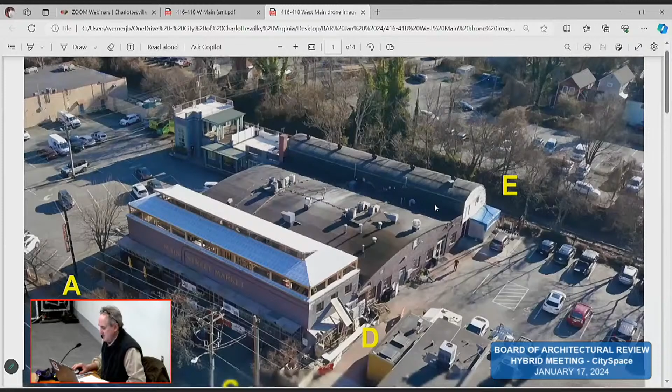So we had a preliminary discussion, so save your voice, I know you're feeling poorly. I'll do my best. So this is 416, 418 West Main. I've got an image up here on the screen from Alan, or Greg was out drone piloting last week, and I added these. There's a couple more, but the A, B, C, D, E in the proposal corresponds with these.

I had E up on the side there next to D in the staff report. It's a deck that'll be constructed on the back part, but if you want, these images are helpful in any way. I can go to them if necessary, and I know Greg and Alan are on, if they want to use them, they can.

So there's this, it's a structure, actually several structures, dating to the 1940s in the downtown ADC district. Just to point out, I know they are on West Main, but the downtown ADC district continues another block and then becomes West Main. So maybe, again, something we'll probably address with the guidelines. But obviously, these were automobile-oriented buildings on West Main, and they are contributing to the district.

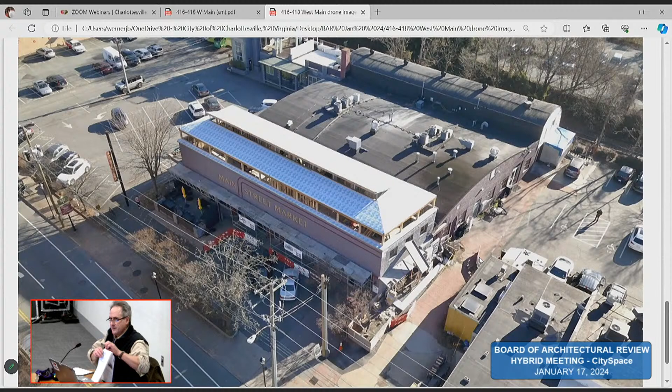The request that they're making is across the front, which would be the south facade of the building along West Main, and then on the west side, constructing some canopies across the front, and on the side, an elevated deck with some canopies above. You all reviewed, well, discussed this back in September, and were generally supportive of it. So now it's coming back as a formal request. There's some details associated with the design, the railing, the canopy.

Those reflect designs of other things already done on West Main. For example, the gas station with the canopy, now called Black Cow, has an identical design. I realize there aren't detailed drawings of some of those things, but there are references to where they've been employed on other sites. Hopefully that will suffice, but Greg can address any questions you have about that.

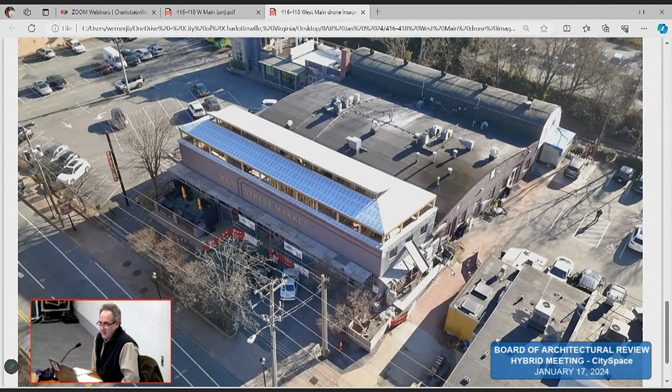You guys there? Yes, hello, this is Greg. Hey everybody, can you hear me? Yep. Thanks. Alan, you on? I am here. Okay, can you hear me? Go ahead. I can do an initial introduction, if you like. Try to pick up where we left off. We had come with...

It's interesting, that photo—before you move on, the scaffolding we have up there for construction of the upper addition has sort of a mock-up character to it, at least for the central canopy we're talking about across the sidewalk.

We came with a canopy over Orzo, similar material as mentioned at 420 West Main, Little Star, now Black Cow, and a little bit of a canopy over Albemarle Baking Company, and a side deck and canopy. Some of the comments were to go to steel.

We have wood for Orzo. There was a feeling that the lighter weight of steel added to the success of 420, and also the character of the buildings in that area.

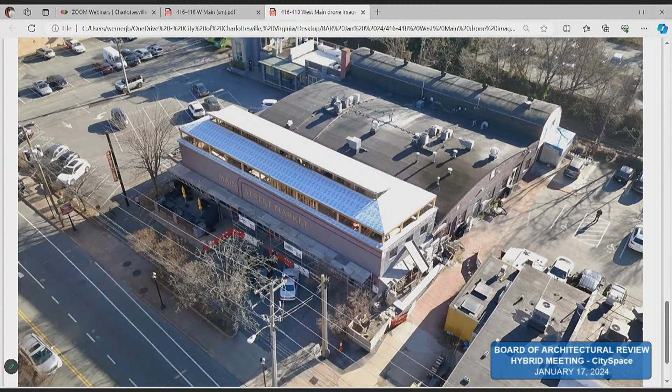So I don't know if you want to go through some of the images. Jeff or Alan, you want to add anything? No, I'm okay.

So, as described, I've tried to keep it brief. We're using the same type of language of the metal tube. We're going to go for darker—we're proposing a darker color, not black, but dark gray, probably towards a warmer gray, just as a nod to a softer color, perhaps.

I know Orzo had wanted wood. We do have wood as purlins in this design, so there is a layer of wood at the purlin level that's above the rafters, just below the white poly roof, that would be there at a regular rhythm of 3 feet on center.

I don't know if it's just worth getting into and asking questions, but I believe we covered a lot that was suggested, and had sort of a comprehensive layout.

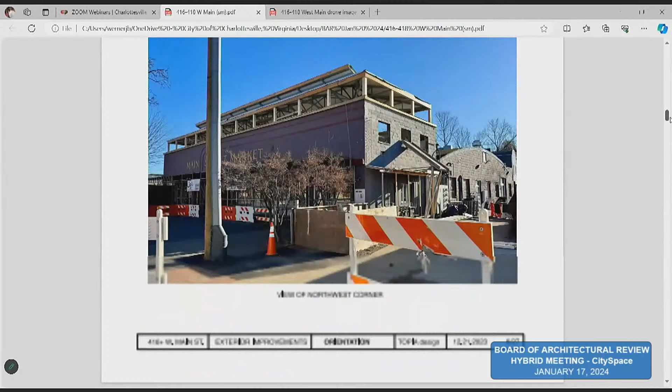I'll just scroll down to the renderings. Some of the initial images are just context, I think, in case you couldn't get out—if you had the flu or the snow or something.

So that's an image. You can see the side deck is flat now with the canopy roof lowered, but it's set back—we didn't want to bring it into the side of the building. And I think there's a desire not to have it fully open, but have some area that's covered for that upper area.

So that canopy on the side deck sets back coming from the corner of the existing building. And there's columns that hold the front part of the poly roof and metal framing, with columns, 3 over at Orzo, coming out of the existing planters that are there.

The brick planters with the wooden slats of previous BAR, it's constructed coming out off of those, and then 2 columns at the Albemarle Baking Company, and for the stretch between those 2, they're supported by cables or rods—that was suggested by the structural engineer, and it lends to the character of those type of canopies.

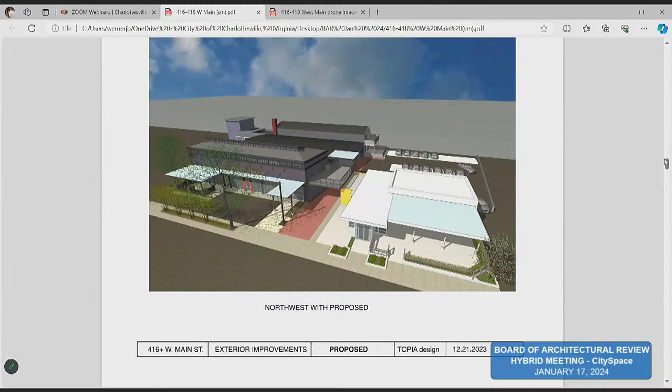And the rear, all the way around to the old fish market building, those are all enclosed with a cement panel railing, similar to what we've done across the street. I just put an image in there, but we're looking at using that for that back section.

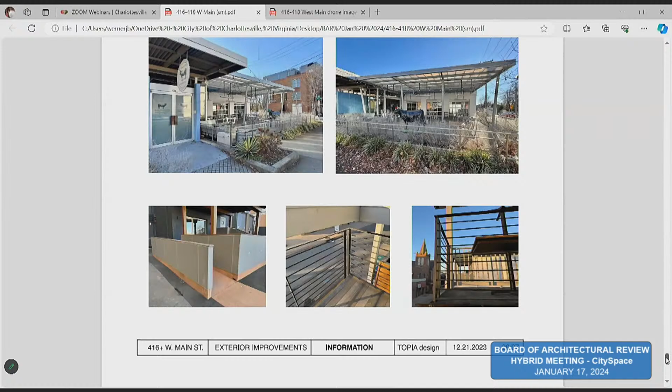If you go up, see the image on the lower left—you can see that fish market. We're trying to, in the back of that upper deck on the side, and also all the way around the fish market, just trying to have a little bit of enclosure, knowing the parking's there and there's a lot of activity. So those are the 2 types of railings for those decks, and we do enclose the patio down below in that back parking area.

That illustrates the same construction method throughout these, which is slightly different actually from what we did at 420. But there was also a call for simplicity, and this is kind of simple 101 architecture of post and beam and rafter and purlins for such a roof.

And they're tube construction, tube elements—6x6, 4x10, I think, and 4x6. And the purlins are roughly 2x2.

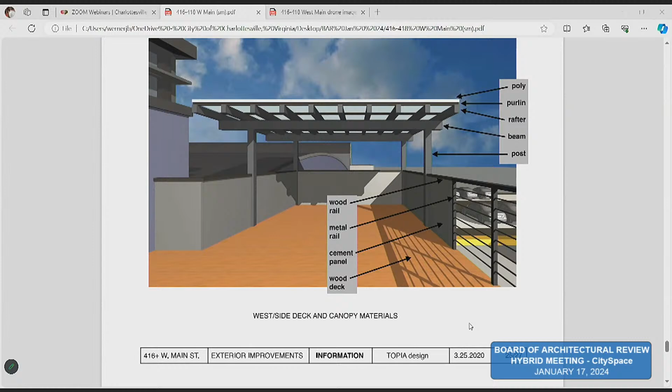The suggested framing for that is that we'll have a steel superstructure and then wood framing in there, and we'll put the decking on top of that. So when you look up from underneath, you're gonna see steel structure, and then you'll see the wood—it'll be exposed, the wood decking. Yes.

And then the polycarbonate—you said that's the exact same as what you put in across the way in the adjacent building? Yes. What is that product, is that like a Kalwall? I haven't really looked at it too closely. It's a manufacturer, we started using it on other projects and just keep going. I think it's made in Texas, right? Yeah, it is. They keep changing their sort of little individual names—they call their company Cover Your Pergola, but there's different types of products within their line.

And I don't know, were you gonna—well, my last question is about the pull-in that's currently, what is it, 3 or 4 parking spaces. Is that going to remain as parking, or it almost looks like in the 3D that it's the grass?

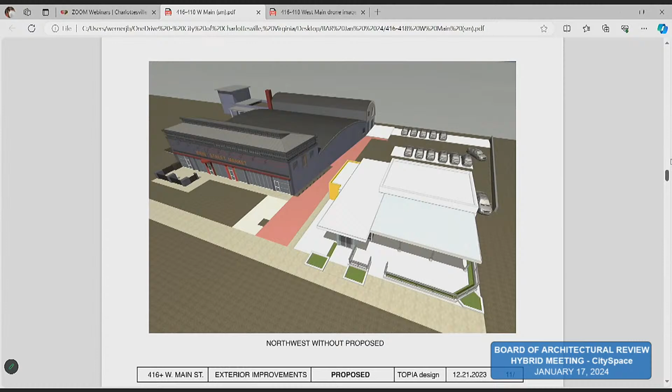So I was looking at page 22, that has kind of like the trees in the front. I don't know if we can scroll to that. Page 22, it's the one right before this. Let me go back, I'm looking at my PDF. There we go, that one. So I was just wondering if all those trees are in the same position? I guess currently what you do is you pull in over that section that's white, which I'm assuming is like some kind of new paver that leads into the Albemarle Baking.

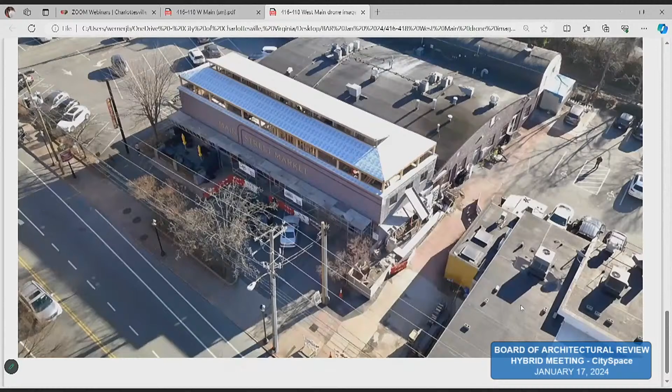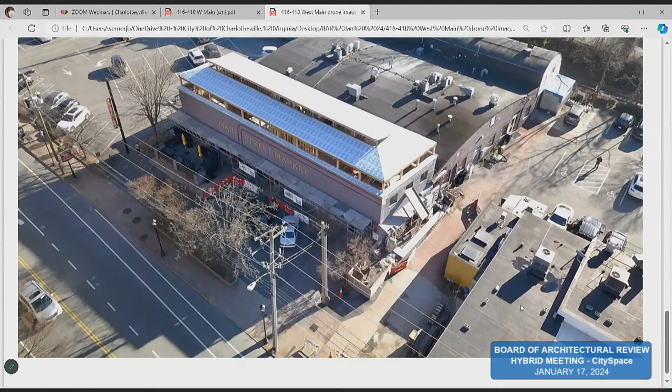Yes, it's kind of interesting. If you walk out there, there's a lot of different paving surfaces, and the vehicles drive over several, especially when you go around back, several different surfaces. We're going to clean it up quite a bit, but it's pretty much going to be left. I don't know if there's a photograph, let me see if there's one.

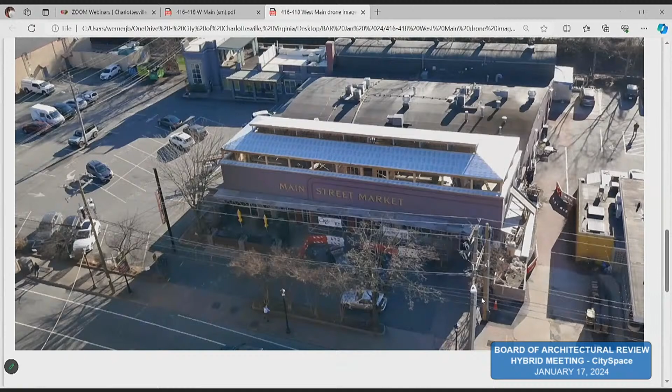But you'd drive it over the white area. There's a sidewalk, there's like a material going from the sidewalk of the street towards Albemarle Baking. Oh, there you go, yeah. I don't know if you can find an image.

I was just wondering if that parking or treescape was changing, but it doesn't look like it, other than the fact that you might put new paving in leading to Albemarle Baking Company. That's about it, I think the trees and the parking remain. Thanks.

Yeah, you can kind of see from that image shown, the drone shot, the vehicle kind of just drives over that area. There's a little bit of paved, and it's a little bit of gray area there I guess, almost like as you drive over the sidewalk to get into the space.

So your renderings have two different colors for, I'll call it, the driveway to the back parking lot. In some images, it's shown as red, and in other images it's gray or white with paving blocks. What's your intent there?

Alan, we haven't discussed this much. I know there's a lot of construction going on right through there now. If there's an intent, the later images, I can see it must have changed along the way. Going all the way back, there's a red stamped pavement that's further back. I can imagine that just being continued to the street.

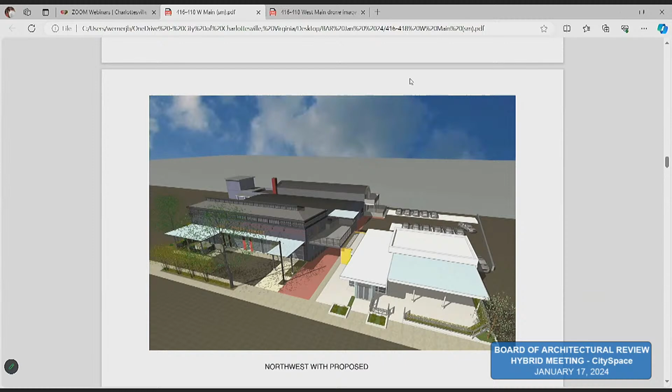That area got pretty beat up, because we decided it was the appropriate time to underground the utilities. So we undergrounded the utilities to the extent we could, maybe in anticipation of one day Main Street, West Main undergrounding utilities, and we would have to rip everything up again, you know?

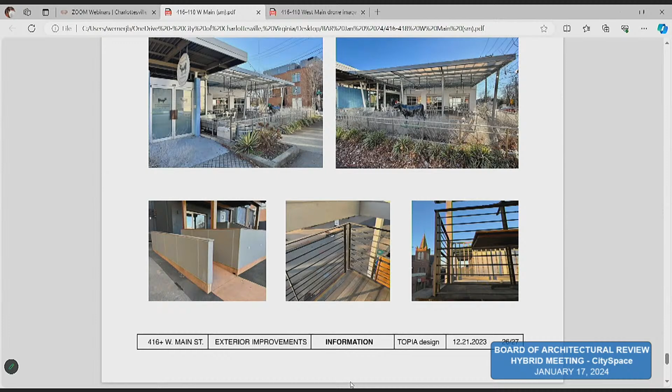I think those rain handlers are an interesting way to do it. Certainly along the narrow facade, if you're sitting in front of Orzo and you have rain, they're meant to protect you from rain. I think we have to be prepared to put a small gutter if we need it to protect the people sitting underneath. Yeah, at Orzo they all slope away from the building.

So the outside edge of Orzo goes past the sidewalk and drops, and that's a pretty big overhang from the patio area. At the Albemarle Baking Company, I think that's where you have an edge that drops, but most traffic is coming from the sides. I doubt folks are going to be walking in off the sidewalk straight into that area for practical means. They're usually coming in from the back parking lot or the side parking lot.

It seems like it's a certain condition where there's just enough rain that there's extra rain coming off that edge, and if it's pouring down raining, it's pouring down raining. If it was me personally, I wouldn't put anything there. I think we've done enough, in a sense, from nothing. But I'm open to everybody else's opinion.

As far as I'm concerned, you're the architect, and Mr. Kajin owns the building, so it's however you guys want to handle it. I'm curious what we'll end up seeing is more of my concern. So Alan, it's up to you, but I suggest we just leave it clean and simple like that. I'm in favor of that, unless it creates a problem, and I don't think it will for the majority of it. I think it's been okay at 420, so I haven't gotten negative feedback that we need more.

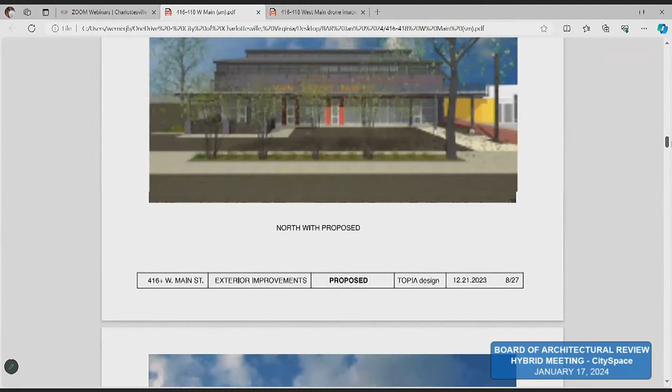If I'm correct and it hasn't changed, we use the string lights, the classic restaurant type. I think those are adjustable, and I have some on my porch that I change depending on the season, the color, and you can even do patterns of blinking type stuff. But I found those fairly successful for situations like that, because they're highly adaptable and just create a spirit, and pretty effective without big glare points, distributed points of light.

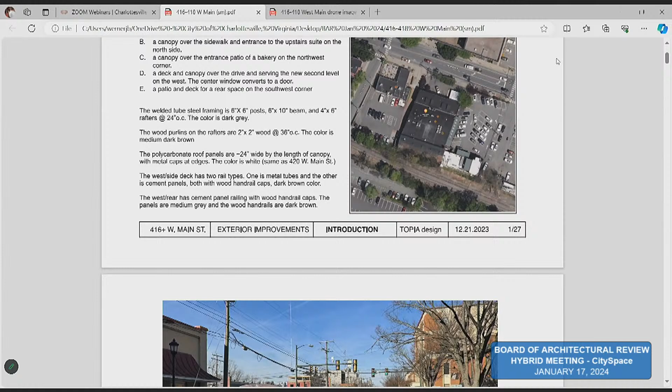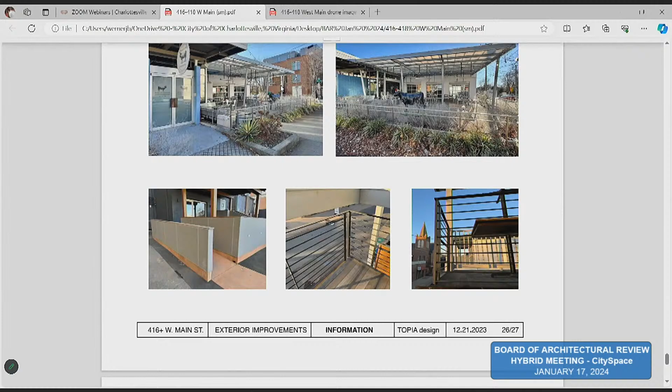Well, I think it's down at page 26, or at least in my PDF. I think that makes sense, and just say that we always put the condition, a maximum of 3,000 Kelvin and dimmable, which allows us to reduce it later if something's too bright, or ask the owner to reduce it later. So Jeff, are you okay with leaving the lights to administrative approval?

Yeah, I mean, I'm not talking parking lot lights or stadium lights, this catenary lights, which I would view as okay administratively anyway. I think I would be concerned if wall packs started appearing on the side of the building, things like that. Right, and I think what we have right now is what is shown and what's presented, and if suddenly something pops up out there that's not shown, I don't think it's okay, if you all want to address it.

Our standard preference is that lamping be dimmable, require it be no higher than 3,000 K color temperature, and CRI of 80, preferably 90. Not less than 80, preferably not less than 90. Finding most of these catenary lights that are out in the market, they fit. But no, the short answer is I don't have any problem. If you all want to say, show me, share with staff what any lighting is, but no lighting is currently proposed.

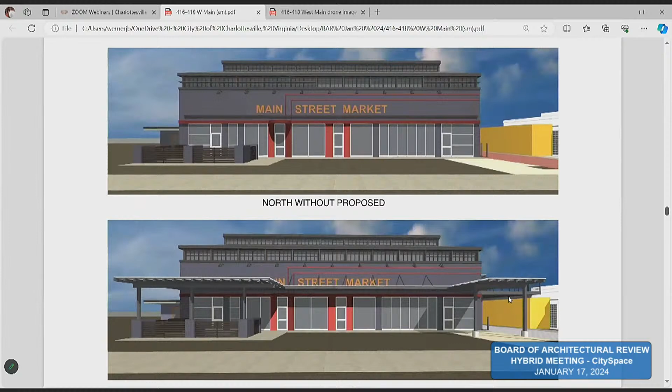I think that talks about what I was talking about. That's close enough to where the less deep canopy between the two larger ones connects to the orzo side, and I think that rod right there wouldn't even be necessary, and then we could adjust the other rods to be balanced out.

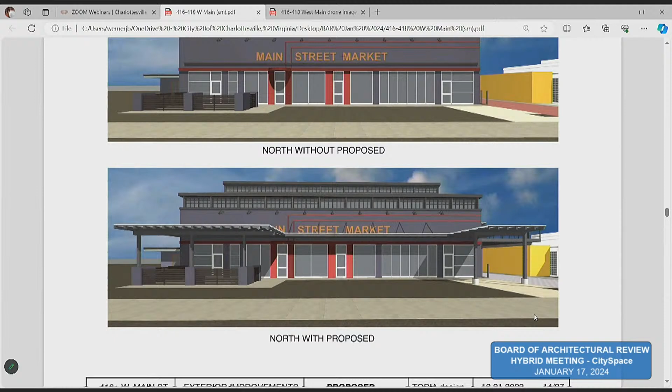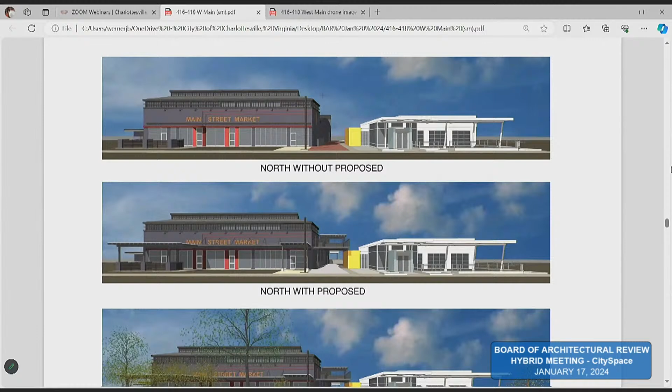This is a minor thing, but in relation to that, it looks like the signage gets blocked now. Most of the shots are taken a little higher than eye level, but that one right there has kind of a nice composition the way it looks right now—the sign with the racing stripes, or whatever we're calling that brick accent. I don't know if you guys have thought about that, but it does appear like the signage is getting blocked from view now by the canopy, and it changes the composition a bit too.

Yeah, I was going to comment on that as well, and maybe preemptively, I could imagine the applicant might want to shift the text to the west, and I think that would be fully in keeping, since the new canopies kind of recenter the building in a different way. Yeah, maybe it needs to even come up a little bit.

Yeah, we have to paint the building when the work is all done, so I think we can just apply for new signage. So we're talking about starting the Main Street Market sign on the other side of the vertical racing stripes? Yep, and then that would fit the new canopy area really well, probably—it'd be right in that zone. And bring it up a little higher, 6 inches to a foot, or something like that.

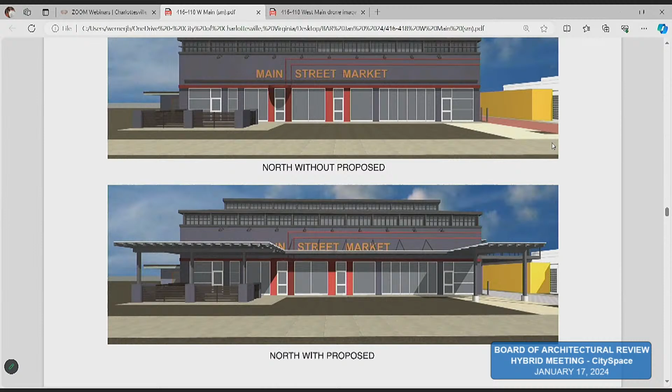Do you have any other comments from the BAR? Just focusing on the guidelines, which is our purview—I think it's an appropriate application. The additions of the balconies and decks don't destroy historic elements, for the most part, that characterize the property, and clearly the new work is going to be differentiated from the old. I think because of its sort of industrial, car, auto sale background, the elements being introduced seem compatible with it and complement it, so they don't destroy what the building was, or whatever's left of it.

Jeff, I'm not sure if you received the email sent today with the survey. Yeah, an early survey - from 1999, the survey showed a canopy across the front of that. There you go. Were we sent that? No, I sent it to Jeff today. I apologize, but that speaks to what you just said.

I think that there actually were a lot of canopies along that edge, the street edge, especially along that facade.

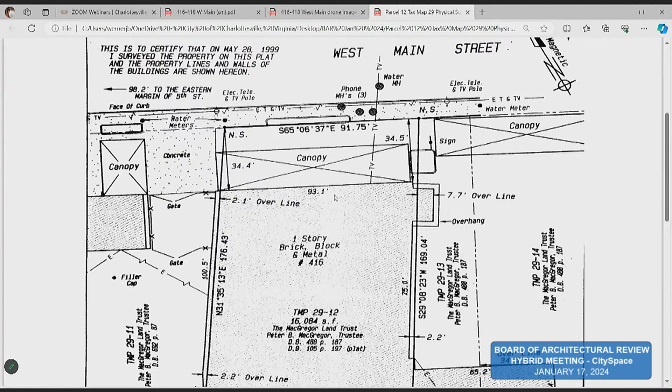Maybe when West Main was a smaller road, it was more perpendicular at that point to the lot lines. I don't know, and then when they widened it, they had to lean it or something. Well, the city and town council records are full of pages of discussions about West Main Street and headaches and problems, so yeah, something for an energetic researcher to look into someday.

I just wanted to add, I think of the house over on Hartman's Mill Road - that's sort of the accumulation. I think this, as a commercial building, is the closest we have to that house over there. There's a whole lot going on there. To tell you what part's what, I'm not sure I could, but it's an interesting building, an assemblage of buildings.

All right, well, if there's no other comments, I think Carl, you were working up a motion. Yeah, I think I've got what we talked about. Having considered the standards set forth in the city code, including city design guidelines for ADC districts, I move to find the canopies, decks, and patios of the north and west facades at 416, 418 West Main Street satisfy the BAR's criteria and are compatible with this property and other properties in the downtown ADC district.

And the BAR approves the application with the following conditions: any lighting that should be added should be reviewed administratively by staff. It should have a color temperature not to exceed 3,000 Kelvin, be dimmable, and have a color rendering index of a minimum of 80, preferably 90. The tie rods for the canopies should be coordinated to not conflict with the accent brick on the front of the building.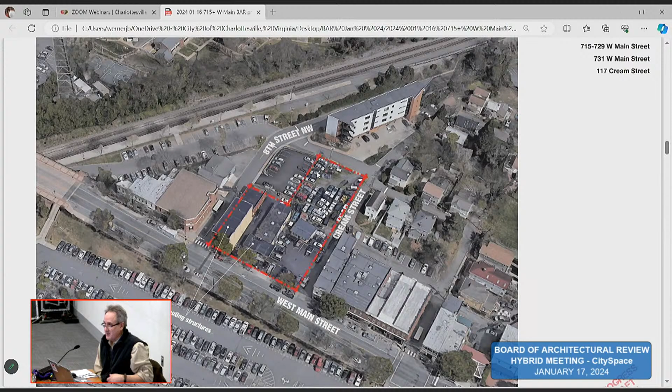The City Council, in its discussions in December, considered an option that survived: the BAR would be allowed to reduce heights on a to-be-determined precise slice of the downtown mall area, and everywhere else under your purview, if the BAR wanted to propose a height reduction, it would be no more than two stories below what zoning allows. I don't know if you'll get into height discussions tonight, but that's where you are on that.

That's all I really had. I just wanted to give you those caveats, and I think you should have a discussion about preservation and retention of those structures, and then material spacing for anything going there.

It's a good test of whether we are designing for what is coming to West Main, or designing for retaining some features of West Main that exist on either side of it. So with that, I have no more wisdom to offer.

I'll hand off to John and Kevin. You guys can use the podium if you want, and I'll flip through however you ask me to.

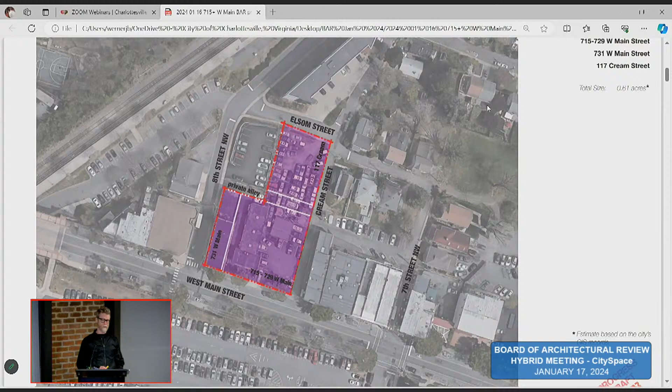The site's a little over a half acre in size. As you can see, the parking lot where maybe some of you park when you go to Continental Divide is not included. That's the one parcel that's not part of this project. Next slide, Jeff.

Here it is again with the boundaries in red. The site is zoned with our new zoning as CX5. There are properties across from it, across Cream Street, that are RA, and that will impose a transition zone on part of this property. You'll see the ramifications of that later in the presentation. Next slide.

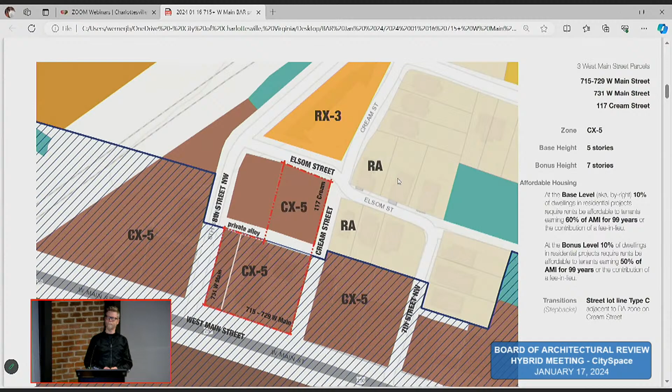Here it is again, this time emphasizing where the design control district is and the contributing structures, which Jeff just described: the late 19th century building on the corner at 731 West Main, and the building in which Mel's Cafe operates, in the heart of the site.

We have some white dashed lines there. Again, you'll see more about this later, where we're asking to what extent these contributing structures might adapt to a newer building, to what extent they could accommodate a new building. Might there be partial demolition to make way for it? Next slide.

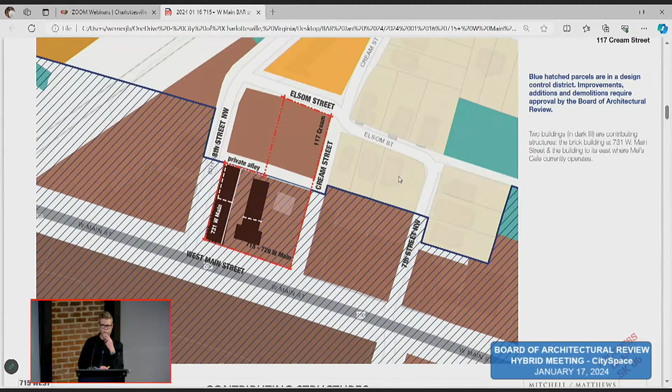So this is just our simple interpretation of where would be the area in plan appropriate for a new building if the existing structures are preserved in part. If the building in which Mel's operates, the part that fronts on West Main Street, were to remain, it does create an opportunity, because outdoor amenity space is necessary in the new zoning.

Perhaps that could be a good location for a sort of entry plaza. In preserving the building, it also gives us a chance to create what could be a nice space, maybe not unlike what's happening a few blocks east of here, that plaza around Public Oyster and Oakhart Social. The proof's in the pudding, that space is pretty nice, a pretty great social gathering space. Perhaps something like that could happen here.

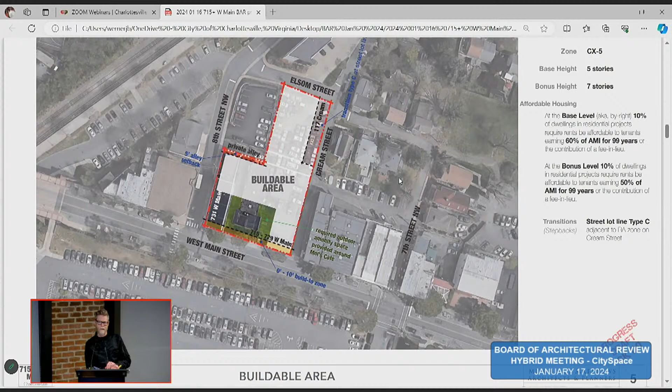We'll go to the next slide. Here we've just changed to more of a bird's eye view. Next slide.

That transition can also happen at lower stories, which is in fact what we have in our proposal. Also, with the CX5 zone, 5 stories is currently the height limit, but we're proposing a residential project which has available to it a bonus of 2 more stories, ending up with a 7-story building. Next slide.

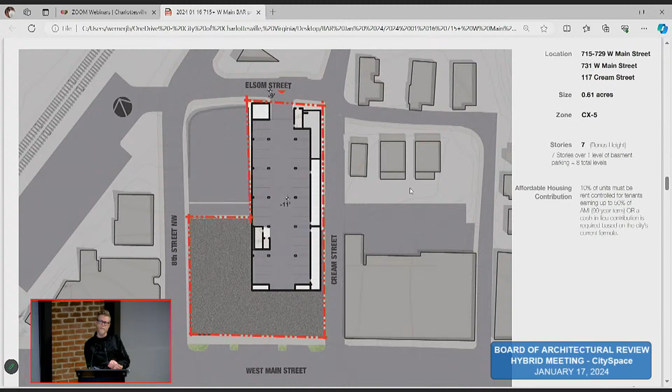Here are just some plan views. This is underground, where there might be parking for the project accessed from Elsom Street. Next slide.

This is street level. There would be some parking accessed off of Cream Street toward the rear of the site. Up at the front, we imagine there would be commercial use in what you might call the wings of the building, in part of the original grocer at the corner of West Main and 8th Street, and then a new wing built that would serve perhaps a retail use. There is going to be some level of amenities in this building. We haven't worked out exactly what would be where, but this gives you an idea of where it's headed.

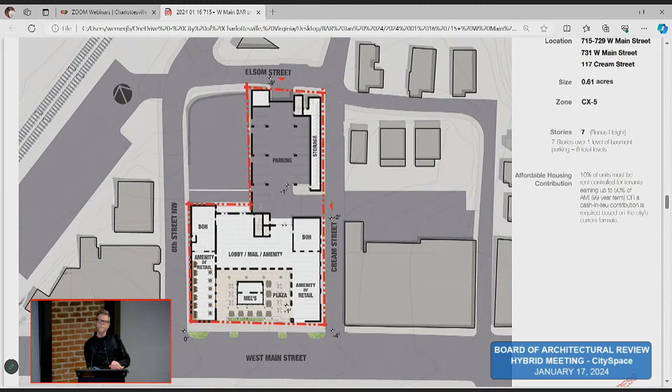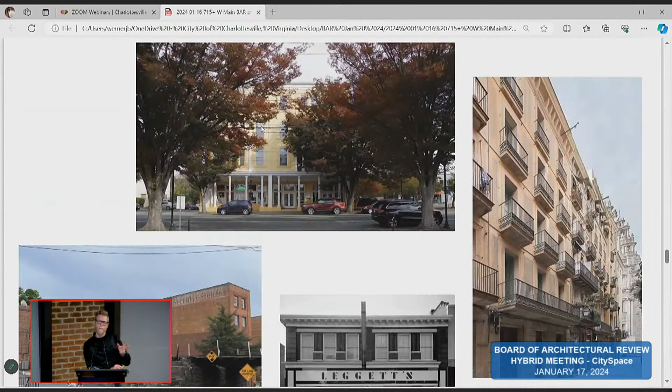On the next slide, we'll take a break here for just a moment to talk about some imagery that has served as inspiration for the project. Some of these are close by, some are not, some are no longer here.

Up at the top is the Hotel Albemarle with that pretty wonderful porch at the front, almost something like an arcaded space along the street. The Norcross Station building in the lower left, pretty great building. It would be worse without that fire escape, in my opinion. I like that a lot.

Down below, I believe that's where the Violet Crown is now, the Leggett's building. The thing there that we really like is that sign with that white glass reflective background to it. It's almost like it anticipates an Apple iPhone chic. Maybe an interpretation of something like that in a sign on a new building could have some promise.

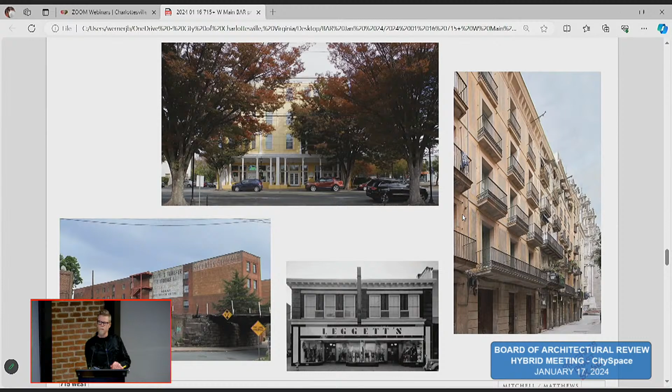And then to the right, a Mediterranean building with just some great, simple detailing, balconies articulated with variation from level to level, a very simple facade, deep openings with doors and windows. We like that a lot. So on to the next slide.

And here is a view of the front, what it could be like. You see the plaza at the bottom surrounding what is today Mel's Cafe. Hopefully would be in the future, even with a project like this coming along.

We picture that sign that might have hints of or be inspired by the old Leggett sign happening there on the right wing. Again, very much a work in progress. We haven't quite imagined exactly what it would be like yet, but just that it's on its way.

A large window opening up to some sort of bar or a retail space. We imagine this would be a nice place to gather outside, kind of among all of these different potential businesses. A lobby is beyond. That is where we might capture something of the Hotel Albemarle's covered porch, that there would be a layering there. There would be columns out at the front, and then there would be covered space leading to an enclosed lobby beyond.

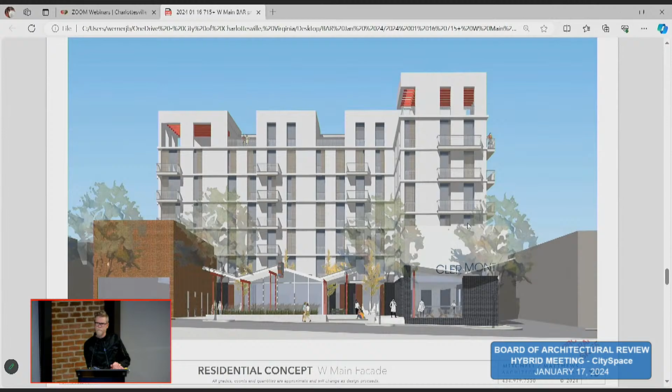On the next slide, here's a similar view, but we've backed away and we're showing more of the surroundings, imagining what it would be like with more trees planted there.

You can kind of see through the trees that what we're proposing at the front with the new wing that's on the east portion of the property, it would be 2 stories tall, so its top would relate to many of the other buildings that front on the street there, which are all about 2 stories. Then on that wing, it steps back about 20 feet before it rises to ultimately 7 stories.

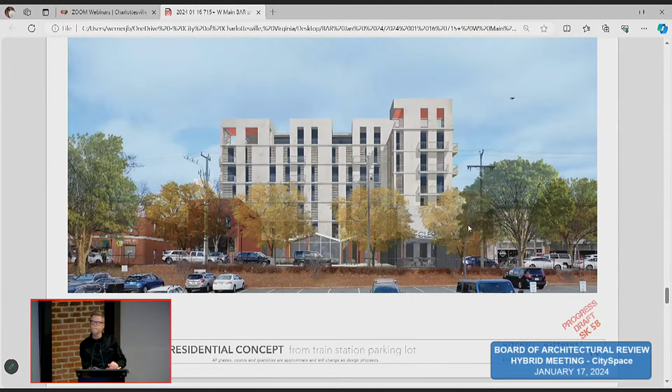Now we can go to the next slide. Here's just another view. Prominent on the left is the 1890s building at the corner of 8th and West Main. And you see again just a different view of the plaza around which this new structure would enclose.

Up at the top, we're imagining that there could be some kind of pavilion spaces. We know the roof decks are rather popular now, offering great views. We were wondering too, might it be nice if Mel's remains to really celebrate and extend that unique W-shaped roof. Perhaps there could be some lovely metal framing that the roof shape would extend out, creating a little more shade, a play of shadows in the plaza.

As you go to the right, the new wing of the building might have a sort of soffit that then echoes the undulations of the roof next to it. So the soffit itself would have a kind of valley shape to it. And then up above, if the steel is to be painted in a bold color, maybe it's reintroduced in framing that's within those upper level pavilions.

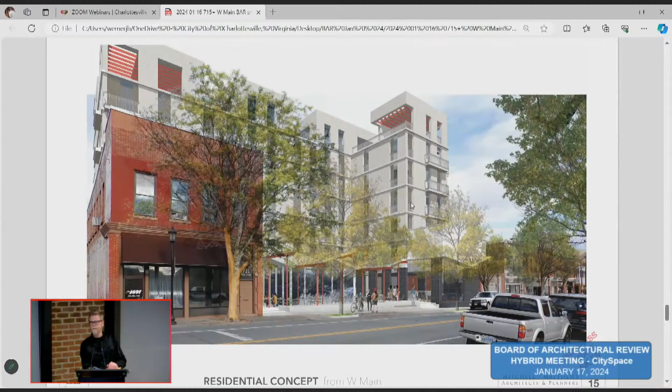So I will leave it there. We're just here basically to get first impressions. Do you see promise in what we're developing so far? Do you see things that perhaps we're missing? Just any comments you might have, that would be great.

Anybody care to start?

I don't know if Jeff can go to the slide with the dashed white lines, where I think y'all were proposing the limits of demo.

Part of my question is the intent — if we retain Mel's, would it continue to be a restaurant space, or do we know? It's a T shape, so I'm curious how far back into that T does the kitchen extend, or the restaurant function space? How much room do you need?

I, for one, would be opposed to the demolition of the front portion of what's now Mel's. I'd probably be open to the demolition of the back portion. I don't want to speak for the entire BAR, but that's where I'm landing.

Similarly with 731 West Main, I went and took a look today. It's clear where the 1930s addition is because there's a cold joint in the masonry. On the west side, there's still pretty clear evidence of where the storefront was infilled.

So I'd encourage y'all to explore that a little more. The idea of opening that up to a view into your amenities, I think, is acceptable, but perhaps look to do some research and see if there are ways to echo and honor the original storefront there, instead of just blasting a big hole, even though that's kind of what's there now. It seems like it had a recess, perhaps originally.

You're talking about where it fronts on West Main Street? Yes, but on where it fronts on 8th Street, you can still read the depth of that original storefront.

I think our idea is for about 50 feet in from the frontage on West Main Street, that the building might enjoy some restoration, but we wouldn't be proposing that much change there. And even along the masonry facade on 8th Street, much of that might remain, but some portion within the building — it doesn't rob it of its depth on Main, you know what I mean? We wouldn't want to reduce it to just a stage front.

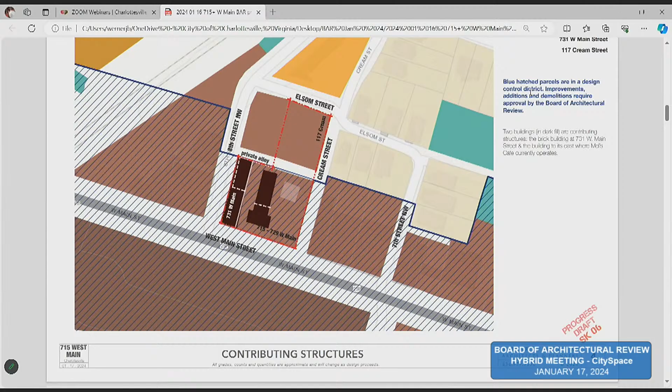Is the 1930s addition where it drops from 2-story to 1-story? Yeah, I think so — maybe 2 steps down. It's steps and steps again, but yes.

How much of that 731 are you proposing taking down? Is that dashed block in the rear the demo portion? So you leave the whole stretch along Main Street existing or integrated? Right, right — there might, like James is mentioning, be a possibility of creating some new openings, but leaving that largely intact.

I appreciate y'all working around the existing buildings. That's what we like to see.

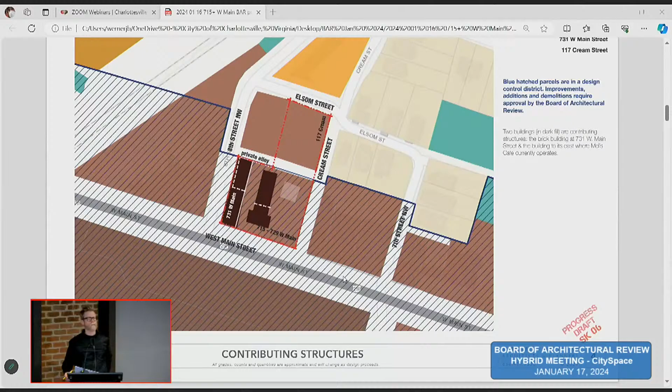Yeah, I like the site plan approach and massing approach — I think it's believable and a good strategy that could yield good results. And I think both the Quirk and the 600 West Main are other good examples of a similar strategy that have worked.

There's a couple of things I think, from the massing standpoint, it's really not so much an issue for us, but this will make considerable impact on the homes on Elsom Street, though they're outside of our consideration in some ways. They're outside of the historic district, but I can imagine that being an issue for others.

From our point of view, the two things that concern me—the massing I feel okay about, but the couple of directions I see in the articulation of the buildings, and I understand they're early, but I don't feel good about the extension of the Mel's Cafe roofline or the mimicking of it in the building. It seems to diminish the original structure, and I would encourage contrast rather than mimicry.

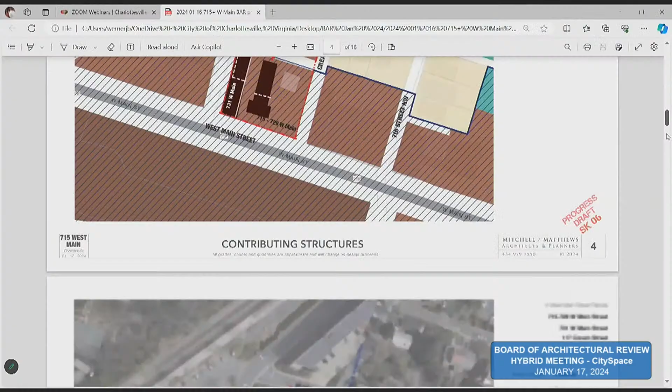I think we just dealt with that in some detail at the now the Black Cow canopy, where working with a similar aged structure, we worked hard for that canopy not to be confused with the original automotive station just behind it, and I think that was successful.

The other thing is that as the building design continues, I'd look for ways to convince us that this really belongs in Charlottesville. There's something kind of anywhere-ness or nowhere-ness about the direction of the building articulation that's happening, and that worries me.

The horizontal banding that is a really strong part runs counter to some of our guidelines about the verticality of large buildings in commercial districts, and the balconies feel really cheap and inexpensive and kind of could be anywhere.

And then I think the other lesson is the first piece that comes out and really addresses Main Street. I think there's an opportunity there to do something to really address the street with the facade, rather than feeling like a continuation of the same floor plate wrapped around. I think the Quirk is an example of taking advantage of that street frontage and really creating a presence that contributes to Main Street.

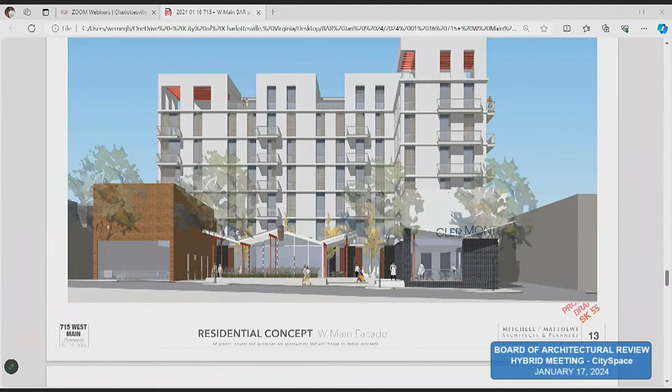It's a little hard to read the image for me - can you go to the next slide? I'm wondering if you could go to the one that's in gold, slide 15 maybe, just to show it more clearly in the future. Probably the next one gives you a slightly better idea, although even there maybe it's obscured somewhat. The aerial view probably helps - I think you can see those individual rafters, so to speak, in the view from above. That sheet should be 11.

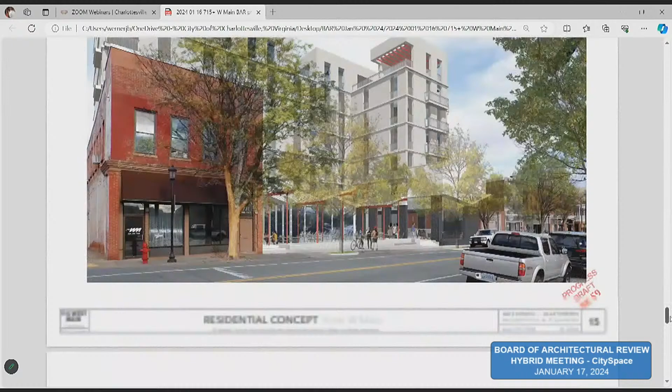But I think that a rooftop amenity is a great idea - as you pointed out, lots of people love them. I think the way you're using the color scheme to try and tie it down to Mel's, that's helpful.

That was just a comment that when I first looked through the slides this afternoon, I was like, oh God, it's the landmark or something. Yeah, maybe it comes off as a little stark. Part of what we were thinking too is that whatever material or color is ultimately used on much of the building, it might be better that it be somewhat muted and reserved.

Yeah, this is very basic, and it is very early going. But we were also making some effort, at least at this stage, to show the potential for those to be somewhat deeper openings, the vertical openings, to allow for, in some cases, maybe just the shallowest of Juliet balconies. That sort of relief could actually be to its benefit, even though in this illustration it creates the illusion of a derelict structure. I recognize it's very preliminary, so I don't want to go down that road too far.

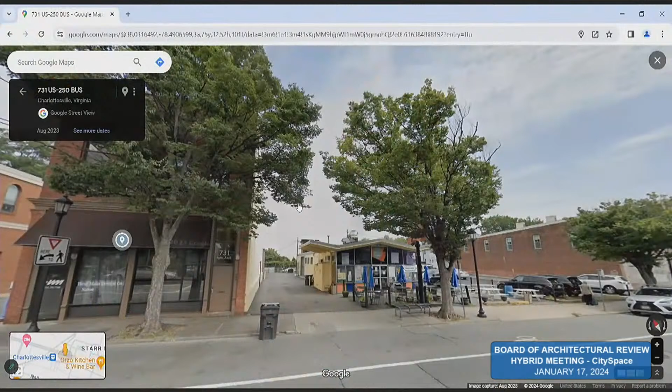What used to be here was just an extension of this building—well, no, separate buildings, but this was a big furniture store that burned down in the 60s, and I hadn't realized this building had been gutted in the 70s. So I'd be curious what the impact of the fires has been on that structure, because I'm becoming less and less impressed with this building.

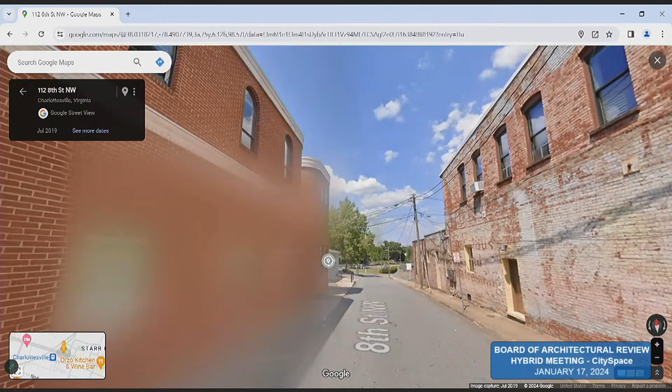The other thing I wanted to show, and I was looking it up—there's this not-old photo. You have this image up, Jeff, by the way. I do agree with everyone's comments about this facade on 8th Street, the grunginess, the toughness, the character of it. I think it'd be important to keep the traces of signs and text. Yeah, there's a lot going on. So this image here, while we have a collective group...

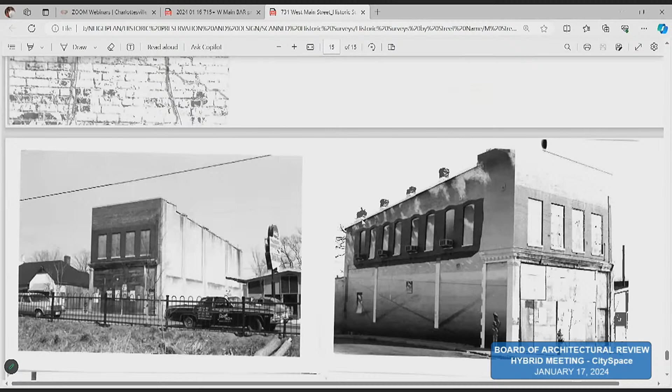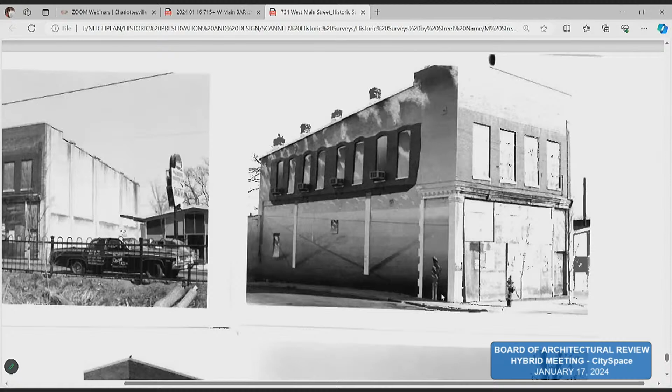Yeah, I think they've done some weird things over the years. It's like you have a sort of pilaster applied and fluted there, but now they've come back and sort of bricked over some of that. It's interesting too, the image on the left—you can see that for a very long time, the brickwork above the second-story windows has had variation that reflects some kind of repairs or slight changes in materials. Seems like they've been patching things together on the building for generations.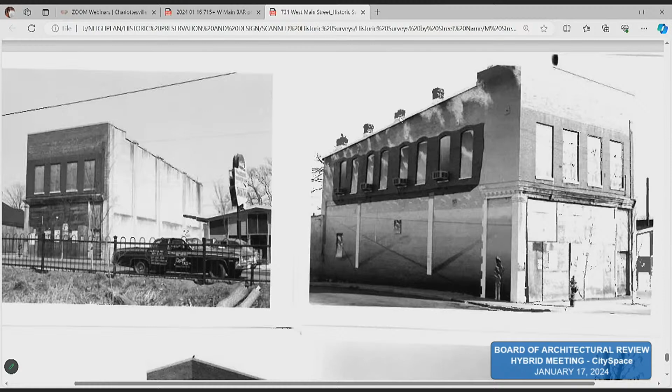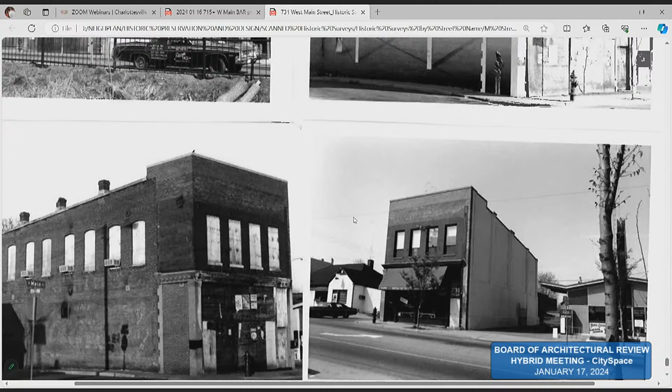But yeah, I don't know what's going on in there. Guess they didn't have any heat, you know, stoves or. There's 4 window unit air conditioners. Why not 4 chimneys? My tiny little house had 4 wood stoves in it at one point, and that was built in 1940. So, sorry for interrupting, but I just wanted to throw those out.

I would think too, I don't know if you guys disagree, when we look at this facade that faces what would be sort of the court of Mel's, the 19th century building—it's just painted a yellow right now, no openings. I would think there's an opportunity to maybe create some openings at ground level there that could be successful. I don't know if people agree with that or not.

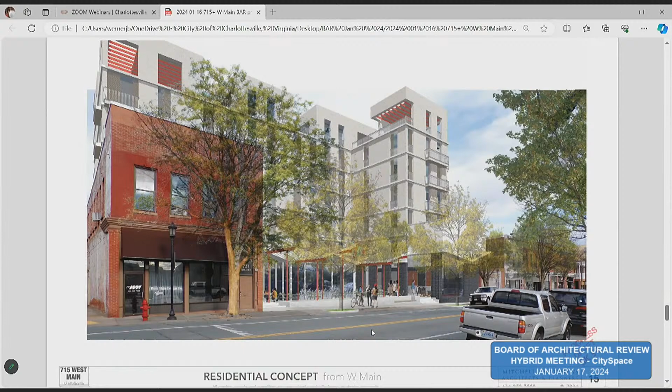Especially if there's never going to be anything cheek to jowl with it again. I would encourage openings that are clearly modern and probably larger than the typical historic openings on that building. It's a similar condition as the ice rink, the code building, where they kept the facade, but then that whole new facade is new on the west side.